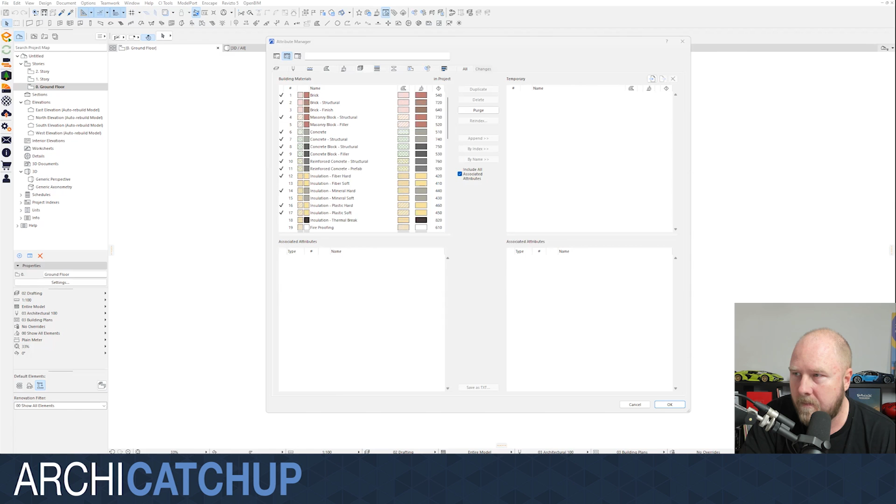Now, the key thing is that as an organization, I think the most important thing is that I would highly recommend, unless you are a little bit different, like Fulton Trotter, where we had thousands and thousands of these, would be to build your layer combinations, pens, line types, fills, surfaces, and building materials all into your practice template. I don't know if there'd be anyone else out there that probably has that level of need to build them into their own projects. I'd be interested to know if anyone wants to put that information in the chat.

But then the idea would be that I end up using the complex profiles and composites for project specific workflows. Now, one of the things that could be really critical is, say, for example, you're in the mass housing market. So you're not an architect, but you're a mass home builder.

The actual approach I would say for those guys would be to build individual composites and complex profiles with their unique identifier, and then just continue to build on that. Because what that means is that essentially you're building types for all your composites and complex profiles, which can then be used by your estimation team and the like, for quantifying and all that sort of stuff. So those are some of the key things I think I'd suggest as the best approach to start the ball rolling.

But say, for example, we have a project here whereby I want to bring in my master. This is my template, or this is my project, and then I want to bring in my master attribute list. Now the interesting challenge we have also with all the different file types - we used to be able to import a few other different types in the past, but now it's reduced a little bit. Used to be able to bring in, I can't remember what it was.

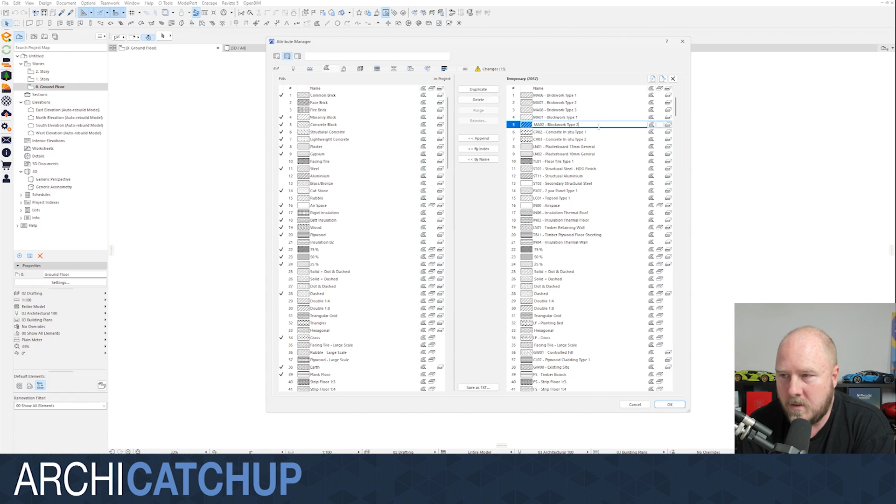Ashwin's talked about, hi, we've had this issue from where past projects, because of poor quality objects, 500 odd attributes get copied over. This is everything. Yep, all right, so Ashwin, a really good suggestion here. This is actually a process I use with IFC files. I think what we could do is probably talk about that in the IFC section, in terms of actually how we cleanse and filter a file before we bring it in.

Ashwin, the thing you're probably talking about is probably the master GDL, and the master GDL is, let me just say, one of the worst viruses that Archicad could essentially have within it. And Dylan talks about fake attribute index being easy to audit.

Yep. And Damien's talked about, I've discovered an issue with the conversion of names to XML. In the XML, it converts the attribute name to a file path. So any attributes named using special characters, Archicad must convert this to typically an underscore. So try not to name attributes using any kind of special characters, as it could be mistaken as a file path. Yeah, Milena's taken the rule not to delete. Do not rename template attributes. 100% perfect.

Jeff, I don't know if I've covered off well enough on this at a high level. I think the really important thing to note would be to remember that there's two ways of handling it. There's the practice level and the project level. My suggestion for most is, if it is possible, to have all of those within your practice template. Obviously, if you have a template as insane as we did at Fulton Trotter, then the approach would definitely not be to do that, because you have too many attributes in your file.

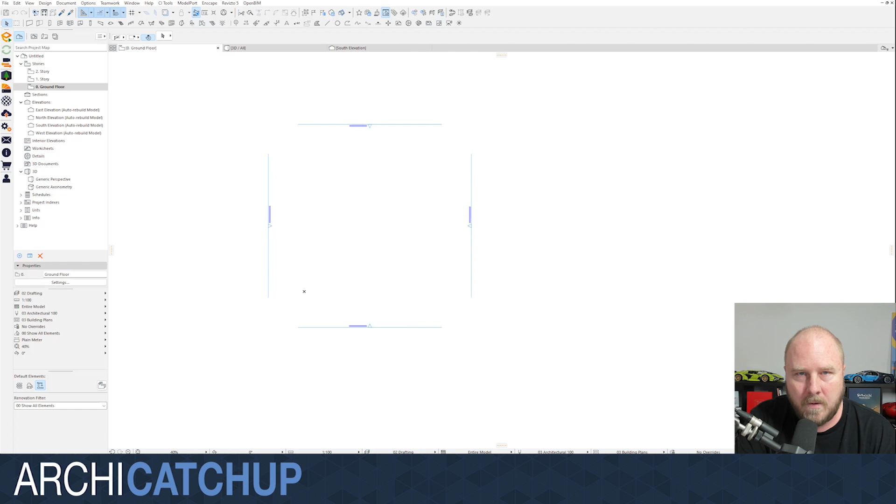And specifically, there's now search functionality, which makes having longer attribute lists really easy, specifically if you have really good naming conventions. And I think that's really important. So naming conventions for your attributes are really, really important, because everything you create then has some meaning to it. So what we'll do is we'll go back over to our PowerPoint.

And Jeff's commented that was reassuring he's thinking along the correct path. That's great to hear. I'm glad that that's what you were thinking already, Jeff. But the challenge is that there's so many ways of doing it. And the key thing is that for everyone here, I couldn't recommend enough to go and watch that presentation that Scott did. It's something that we recognized over a decade ago. So hence why we built a crazy index-based template that had all of those in place.

Edgar's talked about: we've also got a QA attribute, as mentioned by Milena, at the end of each attribute, for example, ID 1000 QA. Yep. That's a really good suggestion. That's a clever tip for everyone today.

So on to topic 2, model collaboration. There were a couple of queries raised or requests made in the last meeting with regards to that. So today I'm going to share with you a workflow I developed probably a decade ago, the collaboration process that I set up at Fulton Trotter, about how we start the modeling process and the collaboration process with people that are part of our team. Okay, technology. Oh, sorry, I'm ahead of myself.

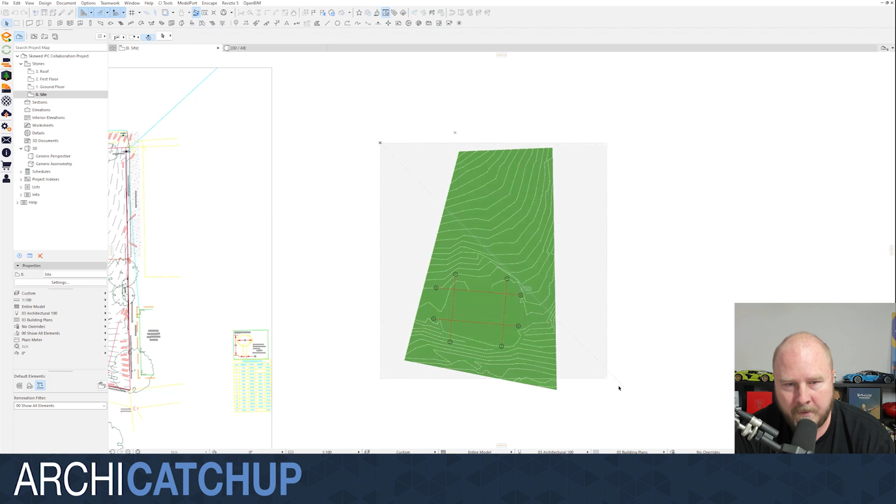So what I've done here, now, normally the workflow that I approach with site locations on all projects is to take a site boundary, and I normally take the southwestern corner of a site, and I'll place that as my, well, if I'm being lazy, that's normally my 0, 0 for all projects, because 99% of the time, every single element within that file is essentially a positive from the X and Y.

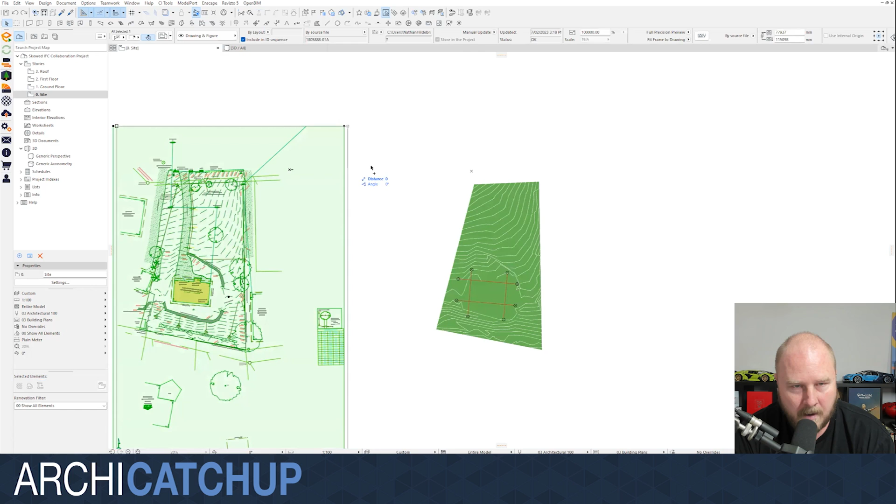In this instance, obviously we have here some negative Y, but I've positioned this slightly differently, and you'll ask why. Now you can see here my site's sitting here relevant to 0, 0, and I'll take off my copy. Now, when I got a detail survey done of this site, the surveyor has put in place a temporary benchmark sitting right here.

So that temporary benchmark is the place where a surveyor will come back to when they go to set out the site. So that becomes a project's local surveying point. Now, most situations, and I say most, and then we'll get on to some of the challenges that have been raised by the community in a minute. But 99% of the time, that's the best approach to doing these things.

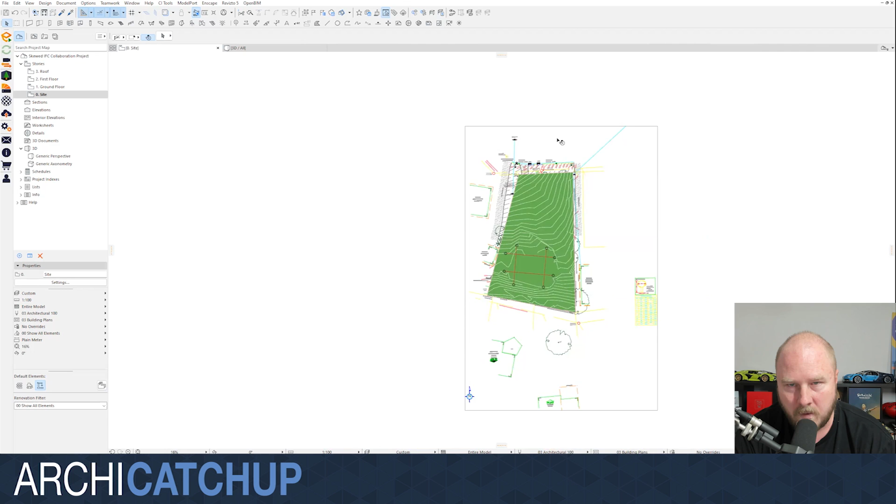So temporary benchmark, it's a known surveying point, and the surveyor will double check that is correct, because hopefully the same surveyor that's done this set out will do that. Okay, so let's just delete that out of the way. So now we've got that in place. North is always up. North, it has to always be up.

If you've got a building on a slight angle, utilize the ability to set your orientation to do your modeling, so that you're not modeling on awkward angles, and you're not modeling to 89.9 degrees or something like that. But all the time, always have north up. So then that's never going to fail. You always want to have that orientation correct.

So what are the things I've done here? First thing I've done is obviously located the site based upon a temporary benchmark. The second thing I've done is put the site in place. And what I want to do is I've obviously got my grids here based upon the existing build.

Then I want to go in and set my story settings. So I've set my story settings accordingly. Now, there are a couple of ways in which you can, obviously, set up levels within Archicad. But the approach I've always taken, even when I've got projects at 540 meters above sea level, is to always have a site story where its elevation is based upon RLs, reduced levels here in Australia, of 0.

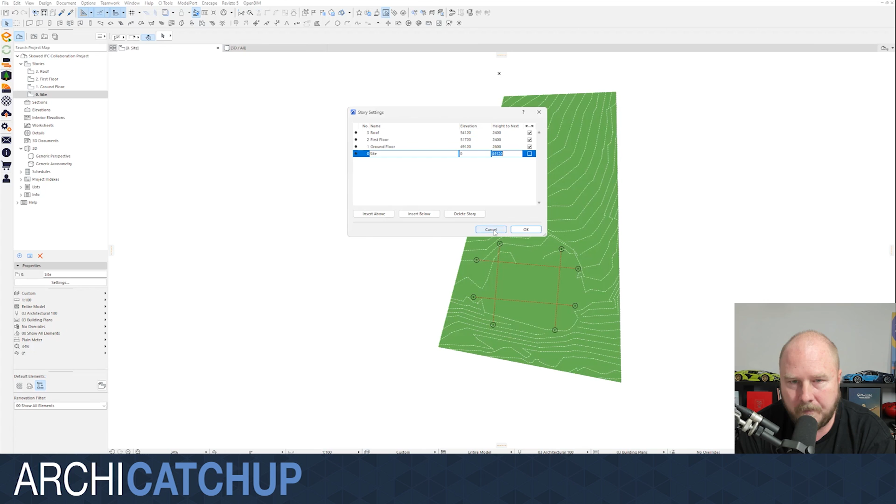Therefore, your first floor level, whether it be a basement or what have you, is to the first level. Then you set out all of your stories accordingly. Okay, so we've done that. Now, I'll get on to the questions that I see coming through in a second. Now, the most important thing is we want to go into each story. And at the moment, I've just placed and put on an Archicad layer.

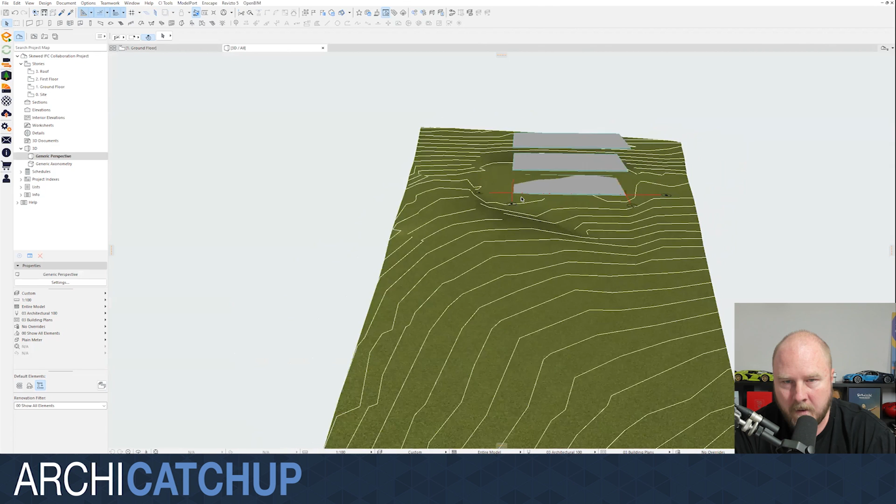But what you need to do is that if you do not have elements on each individual story, what will happen is that when you export to IFC, so we go back into our 3D, and at the moment I've got my grid, and I have one on ground floor, one on first floor, and one on roof story. So if I don't put one of those on each of the floors, that floor won't export into IFC. Now, let's just do this as an example.

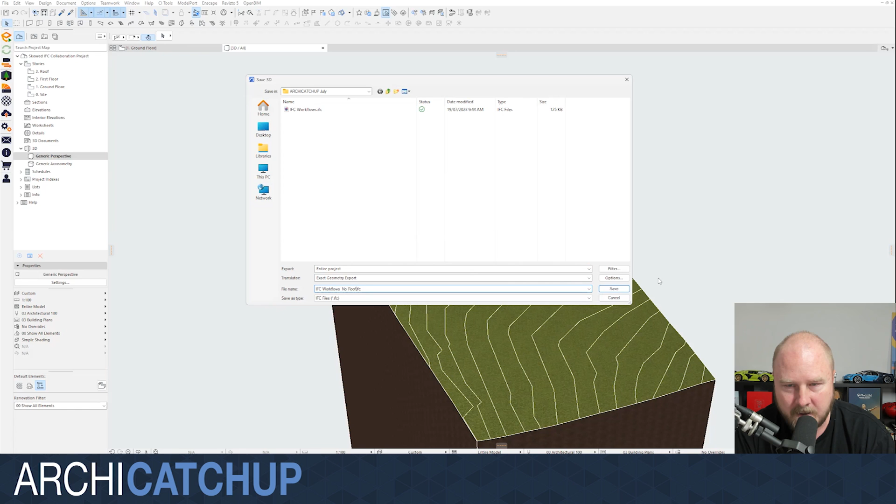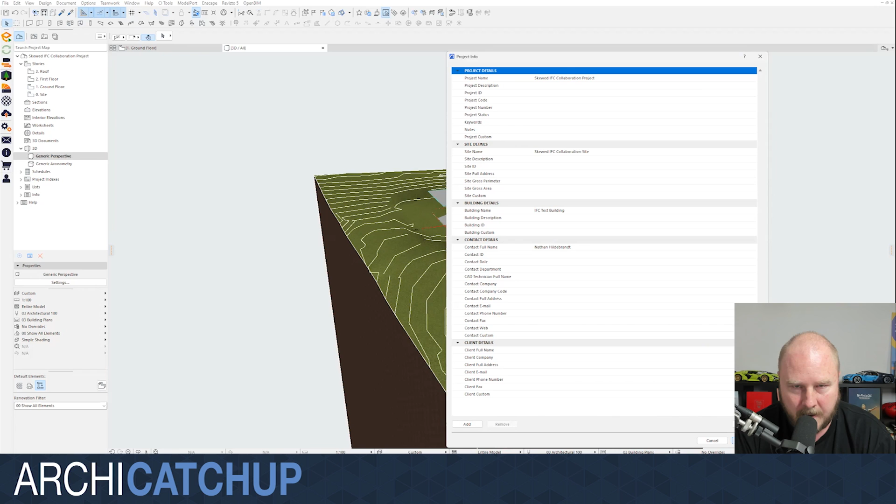I'll just take that floor off, and I'll just do this for a bit of fun. Let's just say the entire project, and I'll call this no roof, and we'll export. Now, I haven't touched the translators at all, and that's another conversation for later today. But so now we've got an export. Now, the other thing that's really important is to actually populate project info, and I haven't really populated this fully. There needs to be a lot more information that goes in here to assist in populating all of the relevant information that goes out in the IFC.

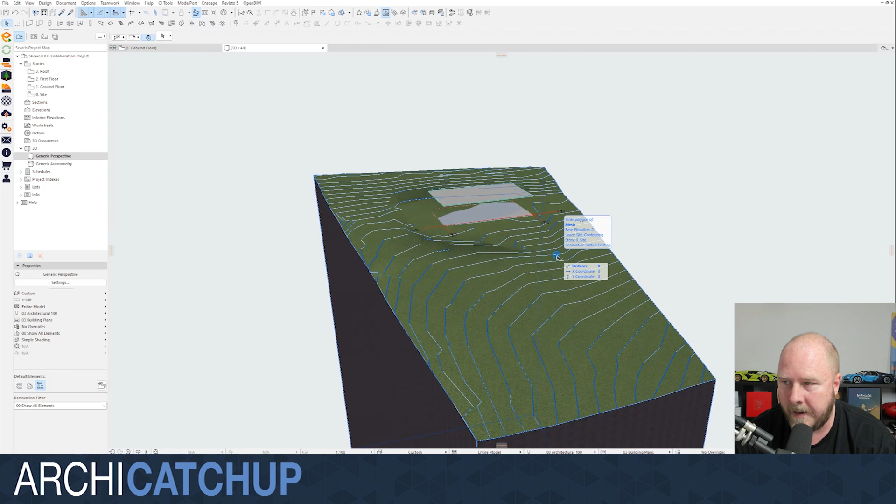So before I move on, I'll jump back into the comments. Blair says, yes, origin set to temporary benchmark. Excellent choice. Damien, agree, set primary accessible and logical site, set out TBM at 00 and AHD or local datum. And Chris says the main issue we have with importing IFCs from Revit-based consultants is their levels are not classified correctly within Revit before they export. If they classify a level as a building story, it is exported within their IFC. If it's not, it doesn't come through. They need to get this corrected their end for it to work. This is a tick box in Revit.

So the key thing is if you're experiencing those challenges, just have the conversation. Nothing's better than having a conversation. And that's why I think it's really important to have the conversation before people start modeling. So it's planning before you do. It's kind of like that measure twice and cut once type approach, right? And it's that conversation where they set that up right at the start of the project.

Damien says they normally call story 0 AHD and set another negative story for site content. What if you place the same grid system on each story? Andreas, that's a really interesting comment. The reason I don't do that is because I end up with duplicates. And I really don't want to end up with duplicate grids. So that's something that I'm trying to avoid.

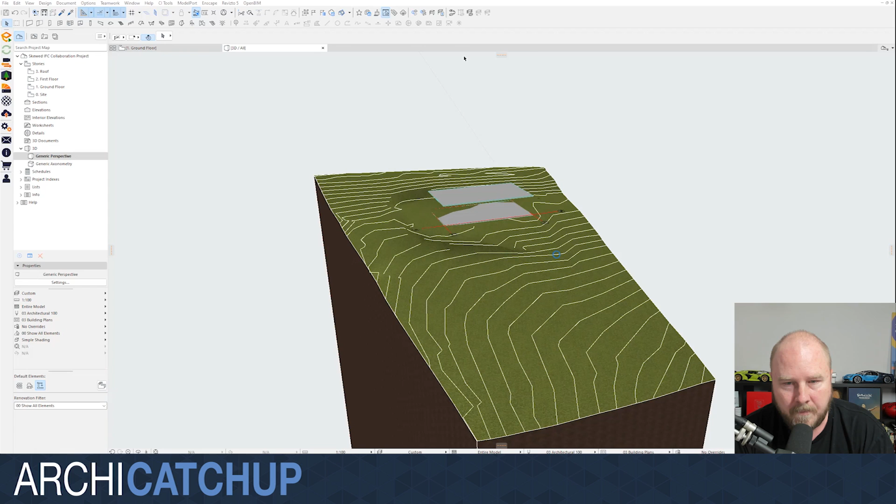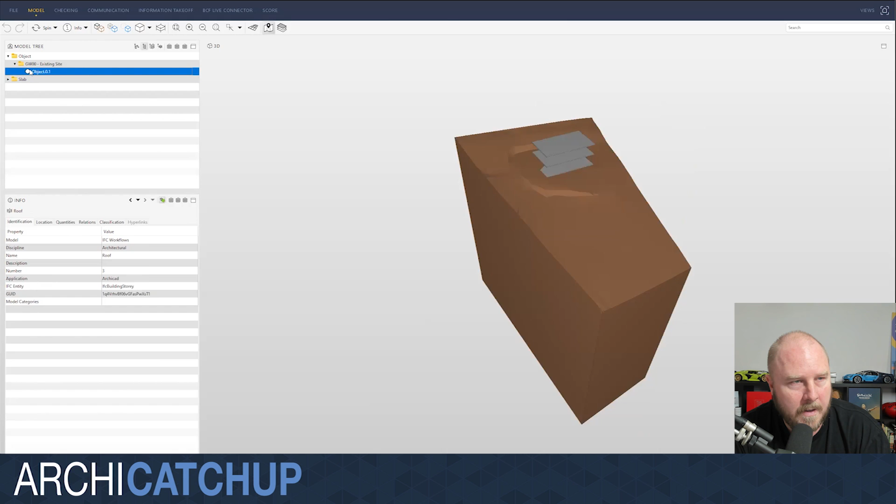So let's see what happens when we open up Solibri, and I'll just change my screen to Solibri. The key thing to note is our IFC tree. For those that aren't familiar with IFC, that was the file name. This is the site name. This was our building name. And these are all our stories. So for some reason, the grid hasn't appeared in this IFC file. I've got to dig down into why that hasn't happened. I have a gut feel it's to do with the translator, and that's something I haven't been able to test before this.

But let's close this model. And hopefully it's going to be a little bit quicker. Oh, apologies for that. The screen share dropped out. But what I'm going to do is open up the IFC workflow no roof file. And I will share the screen of that once that comes up. Just adjusting some things. All right.

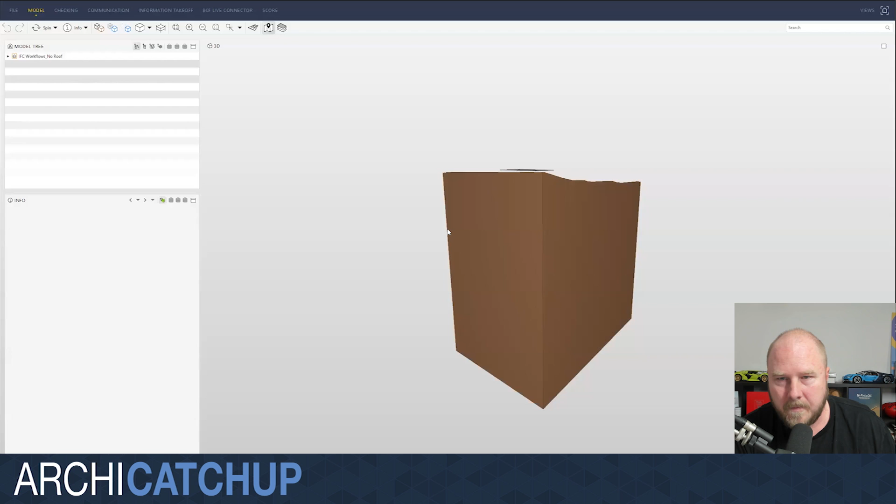So Rowan said turn on the 2D plan. 2D, where are those suckers?

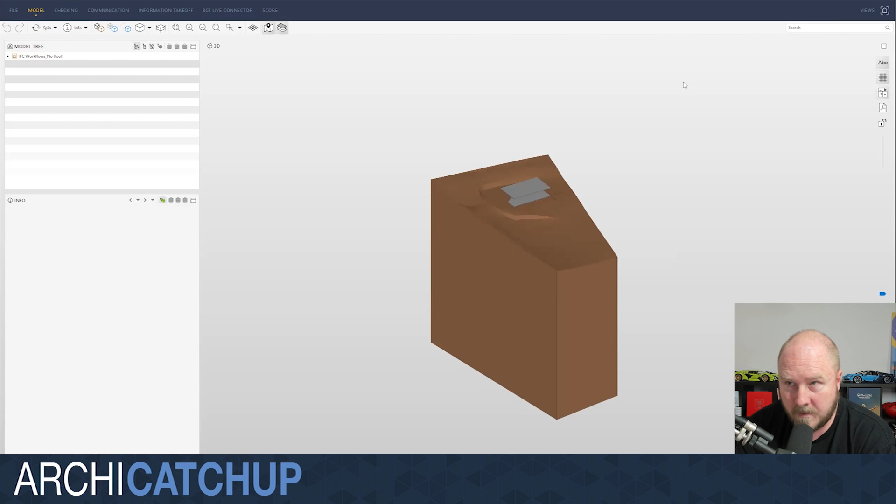Floor plan lines on Solibri. I can't even remember where they are. It's been that long since I've used it properly. Oh, there they are. Okay, so remember this is the second file we saved off. Okay. Now, oh, the roof actually came through.

Oh, it's funny, because I remember doing this several years ago with John Mitchell here in Australia. And Archicad, even when you sent the entire project, the roof story wouldn't come out. But what I want to suggest is that you put in some element into here that people can connect to. All right. So have the same issues every IFC.

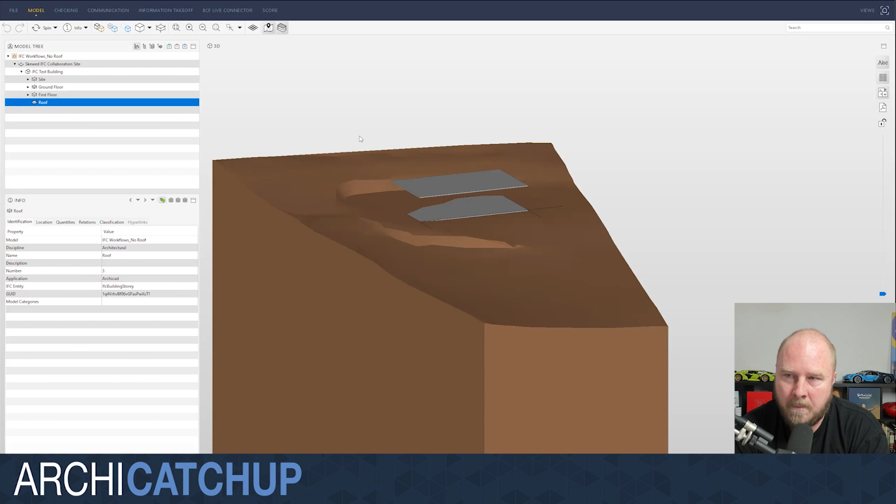Yeah, Chris talks about how we get it right with the initial IFC template, but there's always new stories creeping back in. The key thing is that monitoring approach, right? So always auditing models before they come in, and even suggesting to people that they audit their own models before they send them to you. They should be able to do a kind of check against what they've sent you. But it's exciting to see that Archicad now exports all the stories that come through.

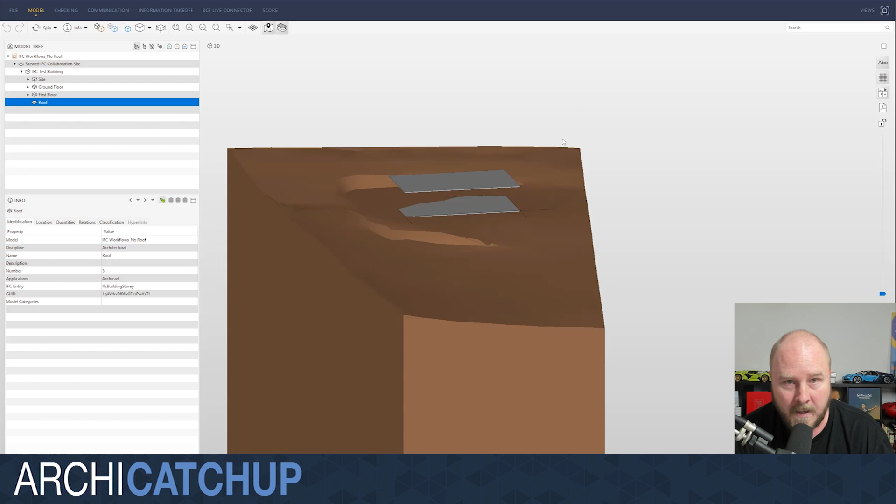Now, I'm losing track of my times, but Moyes agrees a lot of the projects don't have geolocation as part of the fee proposal and it gets asked towards the end of the project phase. And then David asked about pros and cons of setting Project North. If you set it north on every single project, it's a consistent way. Every time someone jumps in one of your projects from your office, they know exactly what they're working with. That's the reason why I do it. It means that there's no kind of changes. It's always the same, and the only thing that ever occurs is the orientation change.

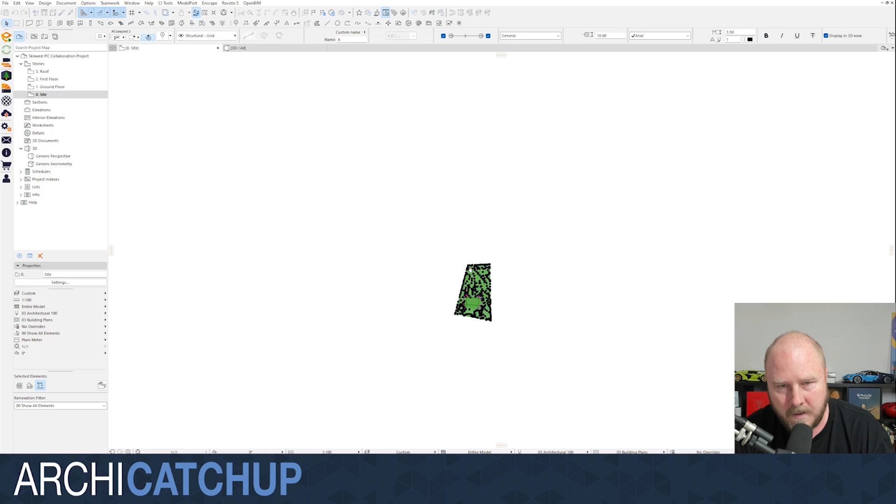So Moyes raises an interesting point regarding geolocation becoming something that happens later. So let's take a step back. At the moment, we actually have a site-based geolocation for this project. But let's pretend that we didn't get one. There wasn't a temporary benchmark provided by our surveyor. And let's put our file back up here at 0,0. Now, there's this new tool that Graphisoft added a few releases ago called the survey point. And what we can do with the survey point is adjust it and change it to an odd location.

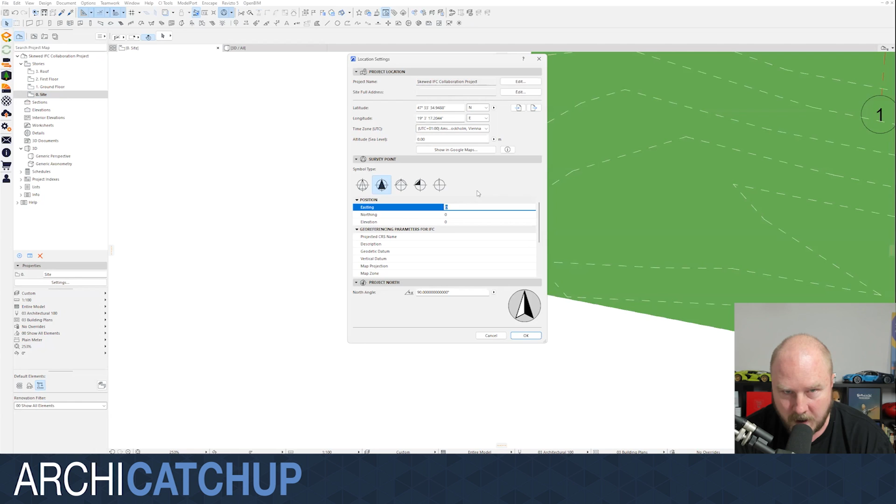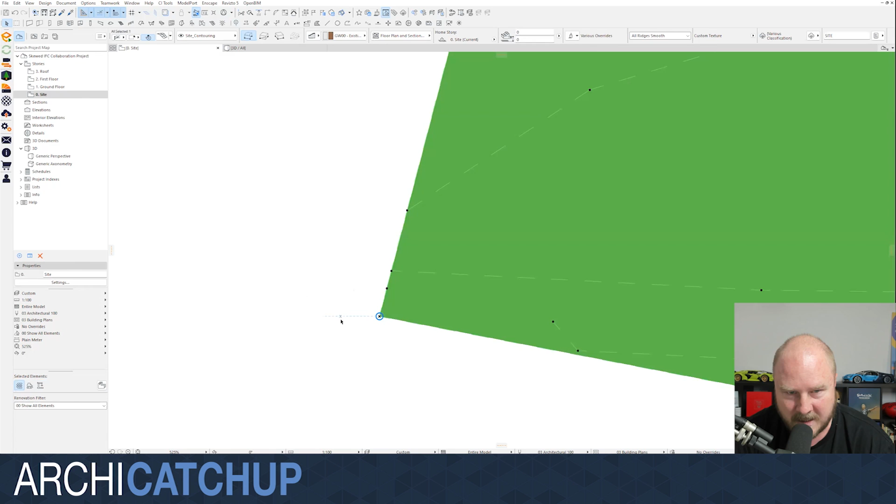Now, I think this should work because I typically don't do this, but Scott, further to your question, and I don't know how much testing you've done regarding geolocation, but my thought process is that within Archicad you would work to a known point. The key thing with geolocation is you need to have been advised a known point of the site with its eastings and northings, or MGA grid here in Australia. If you get given an MGA location, it won't give you the actual location because it could be anywhere on the site. You need a specific known point and its specific eastings and northings, depending upon what you're working on.

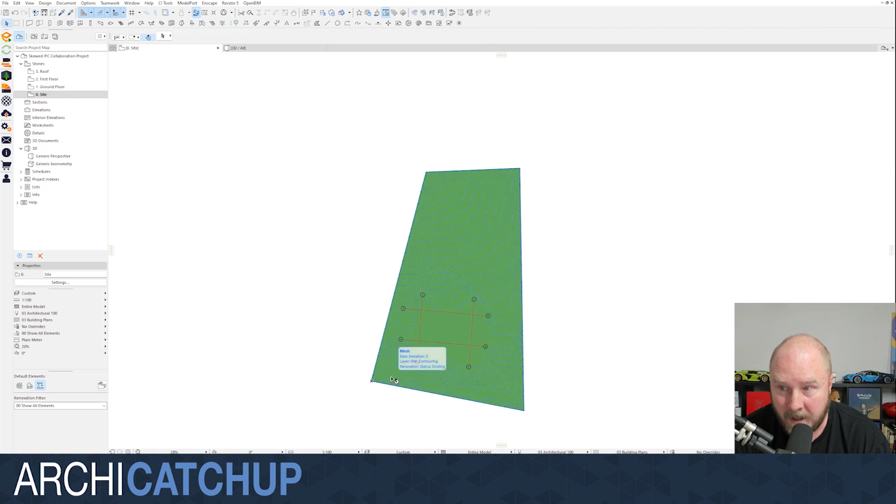And once you've received that information, you can move that survey point to the known location. Let's move this again back to where it was. I've undone all my deletions. So our known point for our survey mark is our temporary benchmark. Now, what we would want from our surveyor would be the precise eastings, northings and elevation of that point. You've got to be careful, because if you insert any elevation that's different to your site, it will elevate it and change it based upon that.

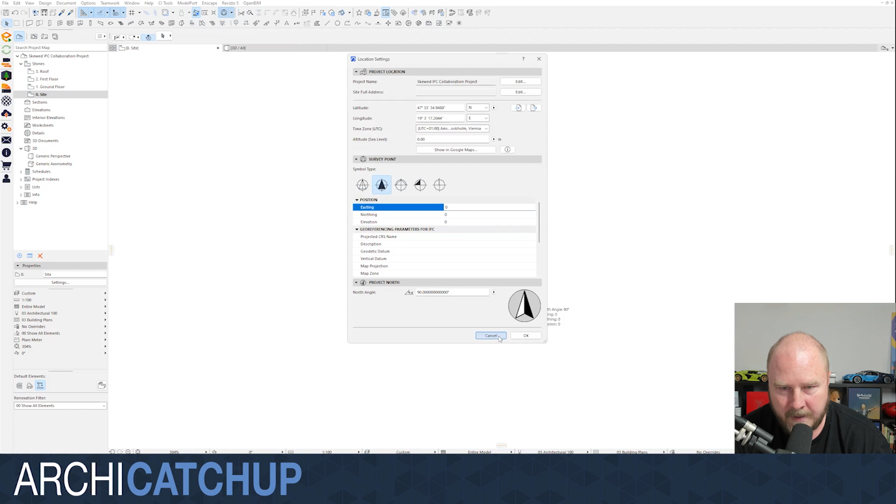But once we've done our eastings and northings, we can come into our IFC translator. Now, this is what I was talking about before. The out-of-the-box translator is reasonable for an average user, but if you really want to do more accurate IFC exports for your clients, you will start to adjust some of these things. For example, you will get into your type mapping and change your classification systems. It won't be the same as the one out of the box from Archicad.

Your geometry conversions, right here, you'll see define IFC model position by survey point and not project origin. So you place in those details here and advise that. That's how you can do it, or you can just go project origin only. And that's typically the approach I use for the majority of projects I work on, as I said before, where I don't have a client requiring geolocation.

And all right, now we're getting some good comments coming through. Damien says, yep, you got to adjust the translator, which is correct. Blair says all the geolocation info should be documented in a BIM execution plan. Certainly should be. But it also should be documented what part of the site or what point of the site should be actually documented on the site survey as well.

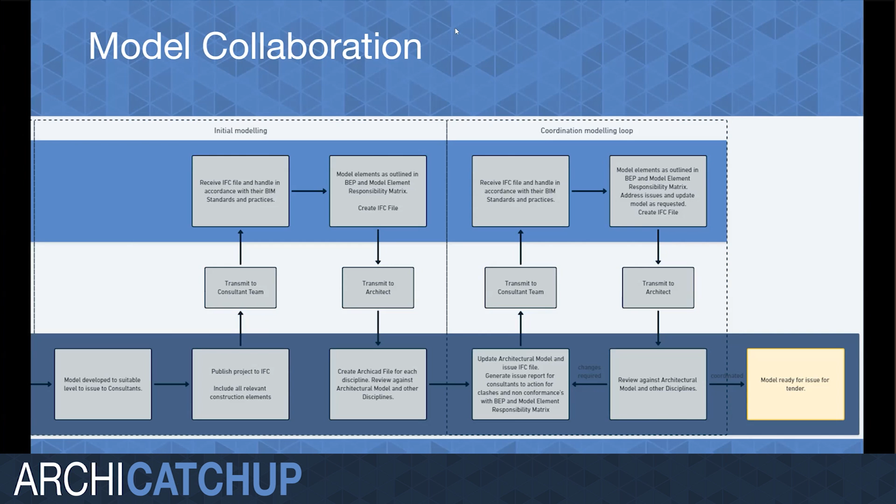Now, the key thing to know from today is that we could talk about IFC collaboration all day. It's actually probably a topic that requires all day, and it might be something we come back to in the future, because there's just so much that we could go on about. But the key thing, and I'll just turn off this share for a minute.

The key thing from my perspective to learn from this comes back to a comment. Before we move on, Milena says, even if easting northing is not specifically nominated as a point, I get it by placing a coordinate object in the survey drawing file. Yep, 100%. It's exactly right. I think I've picked up all of the comments. Edgar, it's quite important to put the survey point on a layer that doesn't show any different packages. So the positive is that it's actually not on a layer, Edgar.

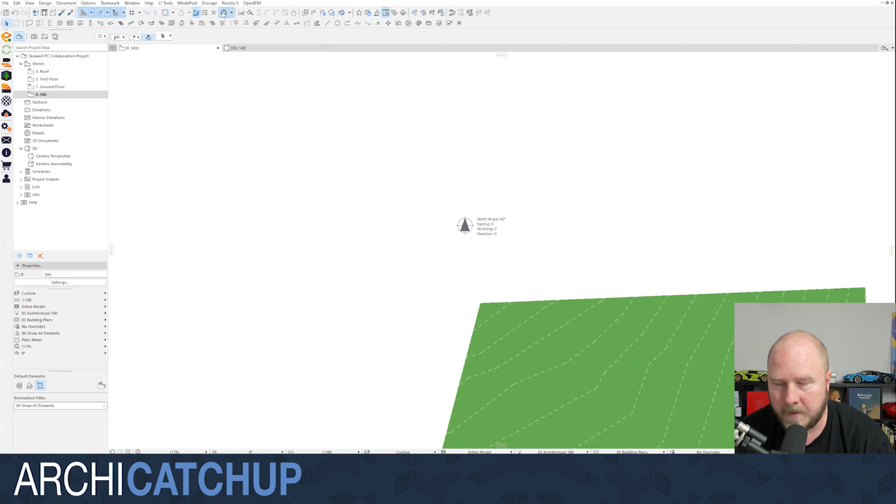I'll just jump back in quickly into this document here. This little magic thing here actually turns on and off. So it's actually not something that sits on a layer itself. Okay. So just a little tip for you to know. And you can put that survey point based on a temporary benchmark and known spot based upon where your site is.

Okay. So further to your comments or questions, Scott, regarding elements where you have yourself and another participant that's responsible for the element. And Blair asked, when do they change the visibility? Must have been 26. I personally haven't used that workflow methodology because we haven't had many asset owners that need to geolocate their projects.

So moving on to Scott's comment with regards to, say, for example, we have structural elements like a column or beams. And we, as the architect, are modeling them at the start, then the engineer goes away and models them as well. Can there be a situation where only one party is actually responsible for it? At this point in time, the position I take is that I still believe there has to be some waste and both parties need to model it.

The reason why I say that is because we're not advanced enough as an industry, where we're ready to trust that whole thing where we're going to collaboratively work together to model one element and have all the information in it that both parties need.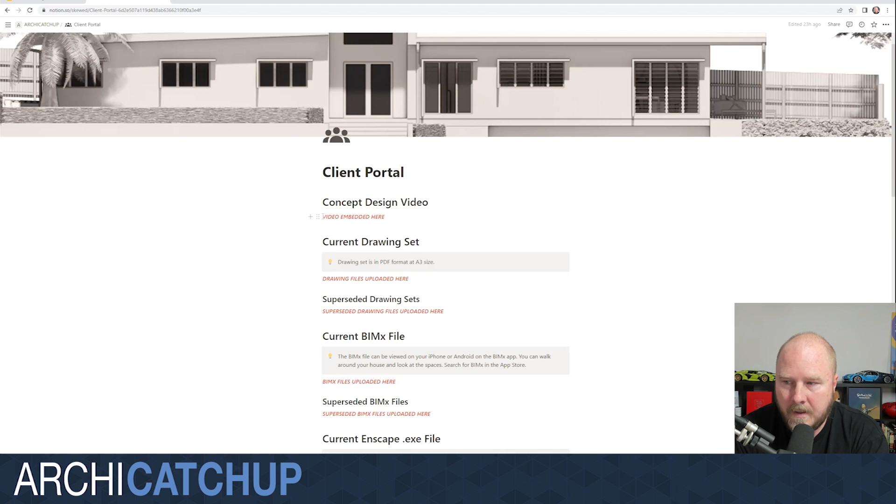I have a Vimeo site I use for my client videos. They're all private, and then I embed them here on this site, so the client can come here and see their concept design video that I made for them.

Now, sending emails or drawings, sometimes drawing files are 30, 40 meg. Notion enables you to save files right here on the page, and a client can click on it and download it off an Amazon web server.

Obviously, for practices or clients that require data sovereignty, this wouldn't be something you'd be able to do, because there wouldn't be guarantees this would be 100% secure from that data sovereignty perspective, but it is secured behind a share portal.

I also drag and drop old drawing sets, so you can move these anywhere you want. You'd upload a drawing set, go to file, and upload whatever file you want, then drag the old files down into superseded, doing the same with BIMx and with Enscape. So that's the base - essentially it's a common data environment for your clients.

Now, this could also be specced up where you bring in your consultants, and you can interact in a similar manner on the project. So you could have a project with a client portal and a consultant portal where you drag and drop files from everywhere onto it.